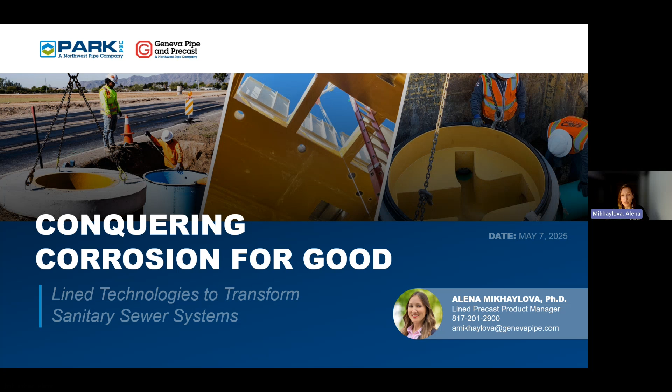Today I wanted to introduce one of the newest technologies you may not have heard of before, but you probably want to know and need to know, because maybe you have the need, or maybe you're working on a project that you may want to apply this product to.

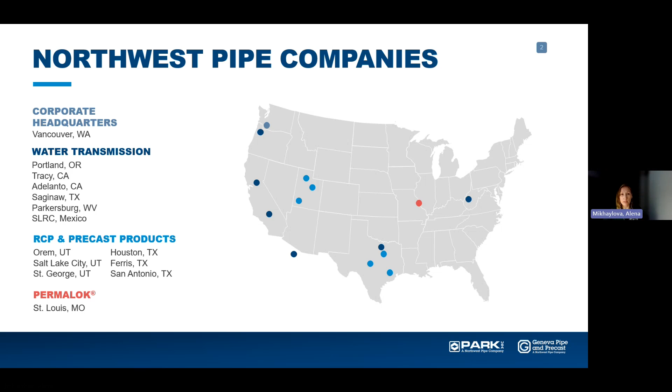So just to introduce our company, Geneva Pipe and Precast is a Northwest Pipe Company that was acquired in 2019-2020. Our footprint is in Utah, you can see the light blue dots in Utah. We also have a sister company in Texas, which is ParkUSA, and now we are ready to bring the products by Geneva Pipe and Precast to Texas through ParkUSA facilities. You can see other dots which are dark blue, they represent our facilities of Northwest Pipe for water transmission lines.

So for today's agenda, we're going to be introducing lining concrete products for sanitary sewer application, and also some products for permanent rehabilitation of sanitary sewer structures. And we're going to go over a couple of case studies that we have done with rehabilitation products. At the end, we're going to have questions and discussions. As Mark noted, you should be able to post any questions that you have in the Q&A section, and at the end of the presentation we will go over your questions. In any case, if we're not getting to your question, we will reach out to you by email responding to your question. So feel free, if you have any question throughout the presentation, just drop a question in the Q&A section.

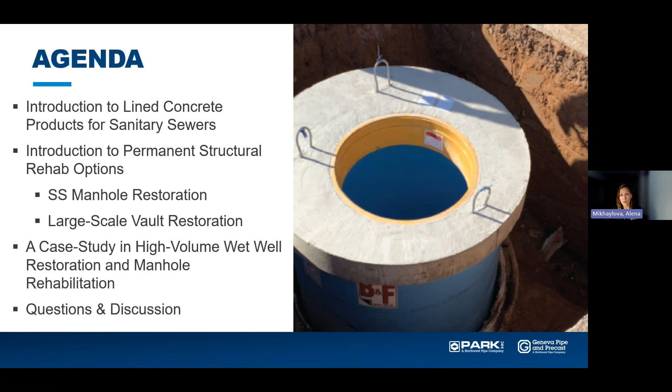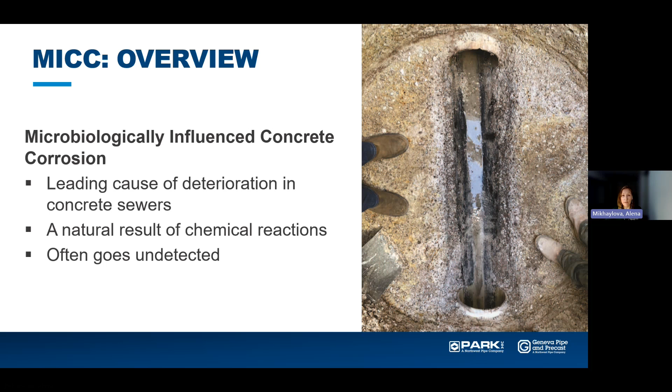So why do we need corrosion-resistant structures in our sanitary sewers? Because the leading cause for deterioration of concrete sewers is microbial-induced corrosion. We all know that over the years, concrete has been used for storm sewers and sanitary sewers, and with time we understood that concrete does not last as long under sanitary sewer conditions, and crumbles and deteriorates much faster than storm sewer structures. That's a natural result of a chemical reaction, and very often it goes undetected because a lot of agencies sometimes don't have asset management programs. They don't survey the structures on a regular basis, and they only find out about the problem once they have an emergency, let's say a collapse in a pipe or a manhole.

So why does MIC, or microbial-induced corrosion, happen? When the sewage goes through the pipe or through the manhole, there are organic matters that break down and create H2S gases. The H2S gases rise to the top, and that's where you typically will see deterioration of the wall in concrete, as it reacts with cement and creates gypsum. Under humid conditions, the gypsum starts expanding and spalling off, and that's a typical mechanism for microbial-induced corrosion. So you're going to have a loss of the wall and eventually potentially corrosion of your reinforcement, which is a structural component of your structure.

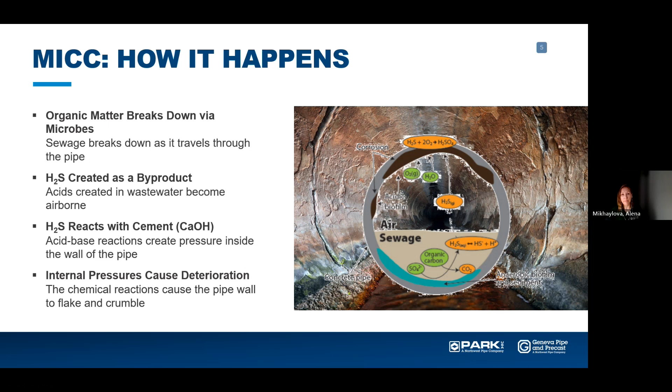In some parts of the US, specifically where you have high heat and humidity, microbial-induced corrosion is typically accelerated. You will also see accelerated deterioration where you have high turbulence or more corrosive environments, like elevated temperature of the effluents, which can also significantly increase the rate of corrosion in your concrete structure. And of course, transit times.

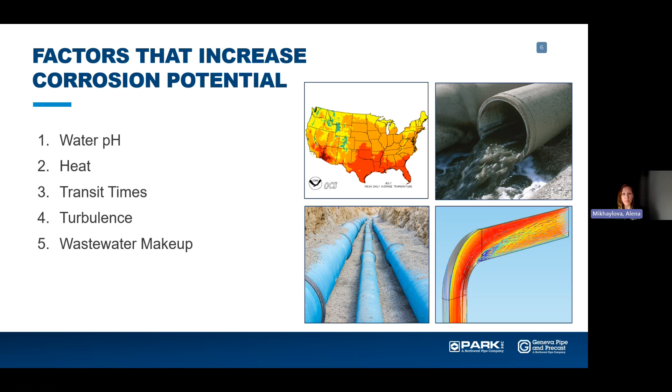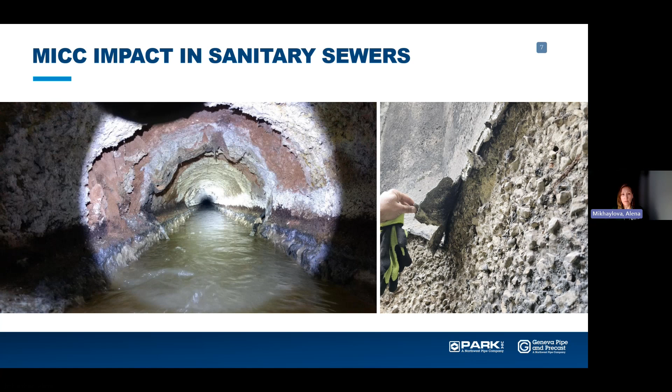On the right-hand side, a photo of a structure that has been previously rehabilitated with spray-on liners. As you see, even underneath the liner, the corrosion continued and the liner starts peeling off.

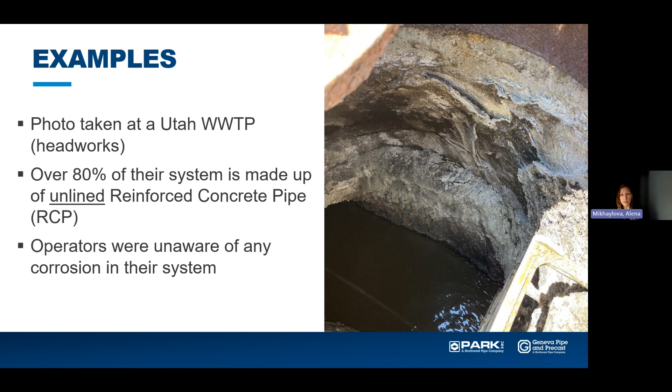You can see some peeling, some gray matter, some odor. Those are significant signs of microbial-induced corrosion.

So how do you identify the corrosion? If you see black or white discoloration, the white typically indicates the formation of gypsum, and black indicates the sulfide presence. There's also the smell of rotten egg, flaking, and a pebbly texture. Sometimes you will not see the flaking, but you will see a pebbly texture on the walls. That's also an indication that your concrete is gradually deteriorating.

Here's another photo, completely different compared to the previous one. Here's your ashy type of deterioration of the manhole.

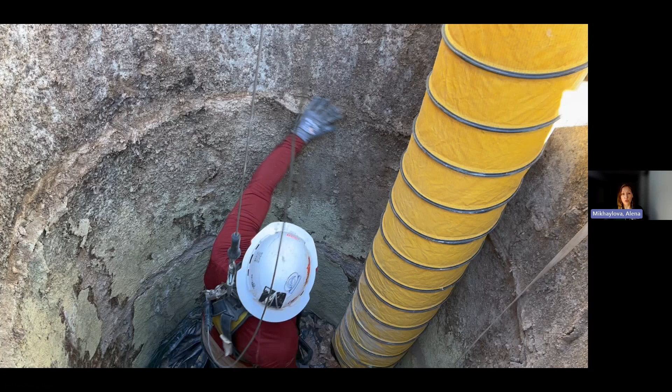I'm going to play you a small video. This was from the rehabilitation of one of the manholes. Before cleaning the manhole, the technician touched the wall just to show how it's deteriorating and losing thickness.

So what are the costs? Microbial-induced corrosion can create significant costs for the agencies, for the cities. There's operation and maintenance - you continually have to go back to the manhole, probably spray it to protect and slow down the corrosion. Then you have to rehabilitate or even sometimes replace. It significantly reduces the service life of the structure, and you have a risk of collapse, especially for structures like pipes.

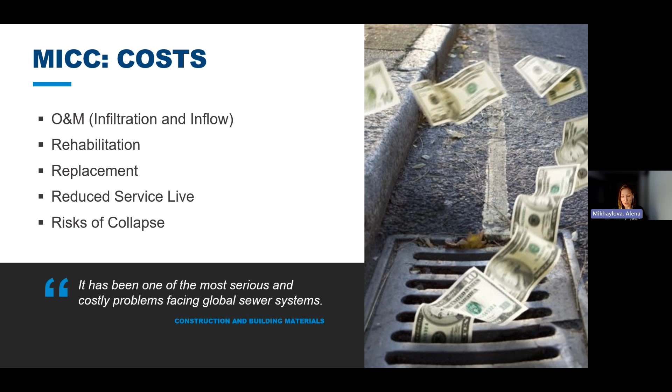So what are the corrosion-resistant options that we know of? One is chemical additives. Then a very common one, field-applied coatings. Then alternative materials and inserts, integrally-lined structures, and structural rehabilitation. We're going to be talking about all of them in this presentation.

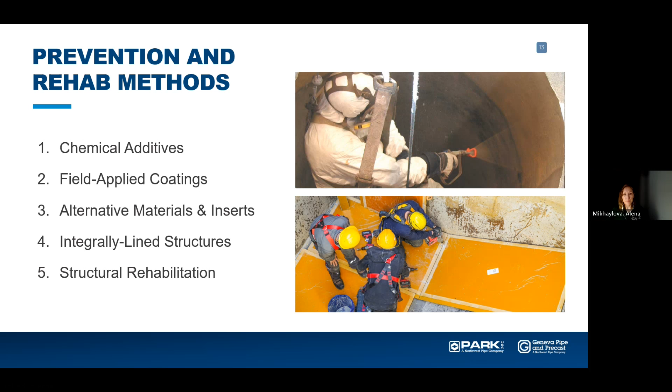So what are the chemical additives? You can add chemical admixtures to concrete to make it more corrosion resistant. It creates anti-corrosion properties in the concrete. However, these solutions are not permanent - they're considered short-term, and with time, the effect of the admixture gradually goes away. But it's very versatile - you can add it directly to the concrete mix structure, and without any additional manipulation, achieve some levels of corrosion resistance.

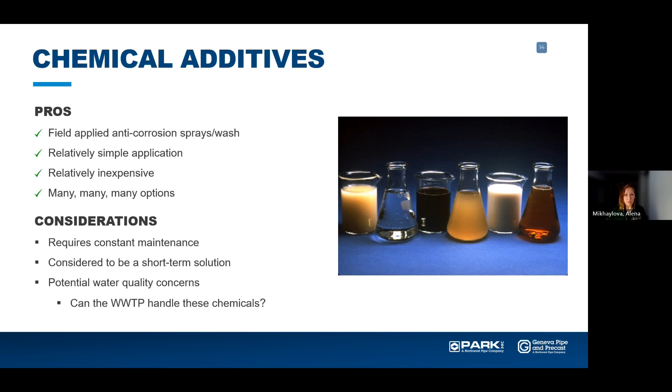The next one is field applied coating. Field applied coating is one of the widely known methods for agencies and municipalities to protect manholes. There's a wide variety of available coatings like epoxy and geopolymers, and it's typically very difficult to determine which one is going to be effective, depending on what you have in your system, how well it's applied, and how well the surface is prepared. So a lot of municipalities just decide by trial and error what's going to work for them.

For these to work, they definitely work - they create a protective barrier between the corrosive environment and the concrete wall. But with time, they can physically degrade, chip and crack, and you may still have corrosion behind the liner. In fact, one of the main failure modes is the pressure you get behind the epoxy liner. If you have infiltration behind the wall, it gets in between the epoxy liner and the concrete wall, and it starts cracking under the pressure and chipping away gradually. Once you have a crack, you're going to have continuous corrosion of your structure.

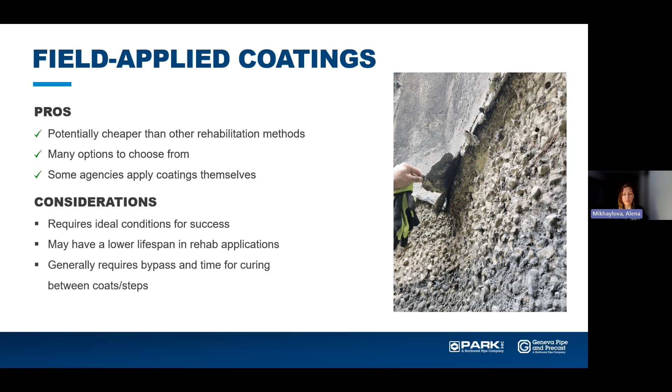Here's another photo of the failure. You can see it also takes quite a bit of time to achieve necessary thickness. You've got to clean it, etch it, dry it, apply it, wait for the layer to dry, come back to apply. So it may take a few days to achieve the necessary thickness of the wall.

Of course, with time, newer spray and liners are becoming more advanced, and you can spray much faster to achieve the thickness. They dry much faster in between the layers. So maximum life of coatings can be anywhere between 2 years, from what I've heard from the feedback from agencies, all the way to 15 or 10 years. But on average, the failure that we're hearing happens in the applied coatings is about 5 to 7 years, where you have to go back and reapply.

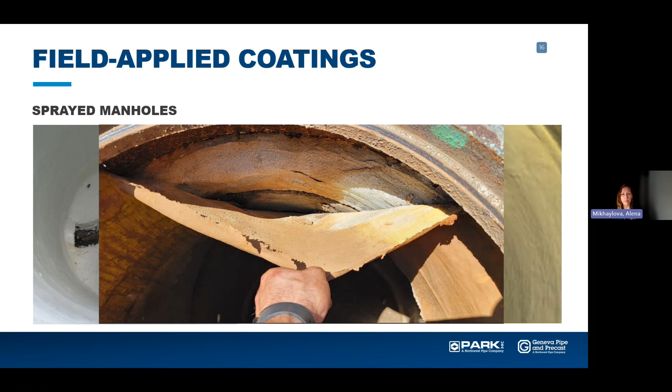So another example of failure of coating, it delaminates from the wall.

So next one is cured in place manholes, or this is another method for rehabilitating manholes or pipes. This type of rehabilitation gives you some structural rehabilitation. It can last 50 years or more based on the manufacturer information. It gives a good alternative for potentially costly, disruptive replacement of your existing manhole.

Those cured in place installations can have environmental impacts, including water and air contamination, which can be mitigated with proper engineering and construction practices. And also, if it's not installed properly, it can delaminate from the wall, from the host manhole, similar to how the epoxy spray delaminates. So preparation of the surface is also vital for this type of rehabilitation method.

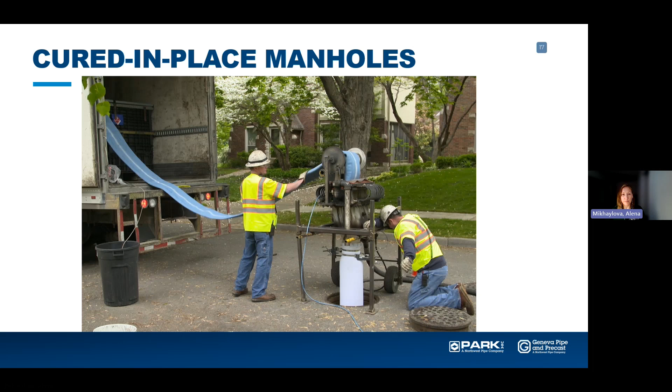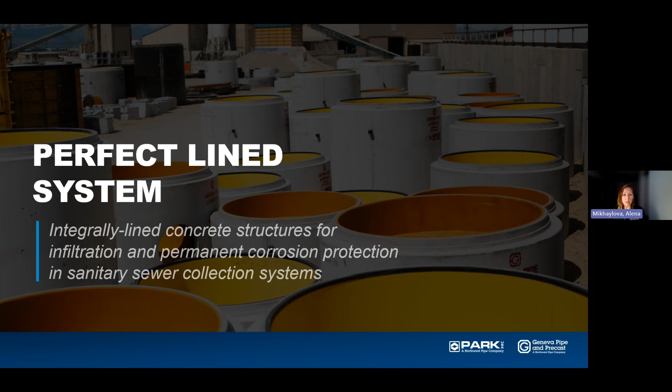So now I'm going to jump over to what Geneva Pipe and Precast and ParkUSA offers for rehabilitation, and as far as corrosion-resistant structures for your sewers.

So this is the first product. This is for new construction. It's called Perfect Lined System, or you may have heard HDPE lined pipe or HDPE lined manhole. It's a fully lined system. One of the biggest differences, it does not require field welding. It's a weldless solution that you can install in the field fast.

So one of the components of this system is Perfect Pipe. You can see the illustration on this slide. So Perfect Pipe, we offer it in sizes of 24 to 48. We do manufacture it in Utah, so this is something to be cognizant about.

So if you have a project somewhere, let's say in Texas, and you need high strength, it's a deep burial, maybe high loading capacity is needed, like aircraft or high construction load, this pipe will provide you that strength. We can adjust the reinforcements in the concrete mix to make the pipe stronger.

Then one of the systems is fully lined, Perfect Lined manhole. It's fully customizable. The available sizes are between 48 to 96 inches. And that's where you don't need to have the welding in the joints. But if you need larger sizes, they are available. The only difference would be you have to weld the joints in the field.

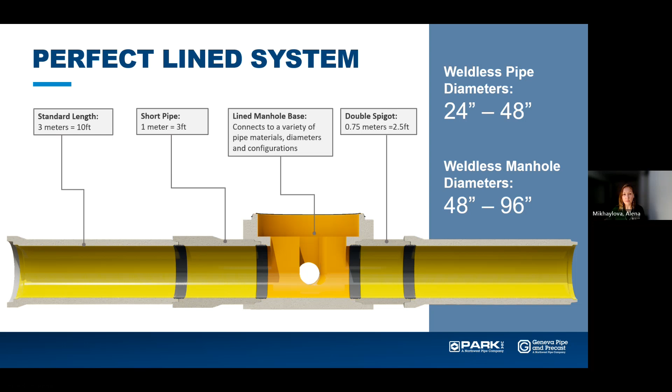So this is a photo of Perfect Pipe. Perfect Pipe features a coupler. So the black coupler on the left-hand side that is attached into the bell, it's factory installed. So all that the contractor has to do is home the pipes together in the field, lubricate the joints, and push it in. No welding necessary. This coupler creates a watertight joint in the pipe.

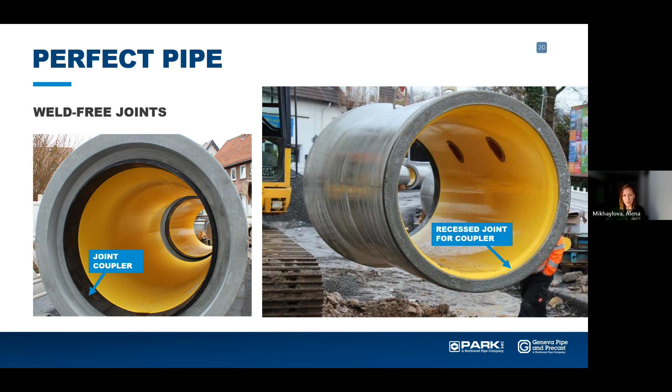So these liners have anchors, and they're integrally cast into the pipe, so they will never peel off. Similar to if you had a spray-on liner, it's not the same. It's an integral cast, so it holds up really well.

And so you may have heard previously, PVC liners were very popular. They started off in the 80s. It was a T-lock. It had some design flaws, and the water would build up behind it and pull off some of the anchors. The advantage of the yellow HDPE liner is it has independent anchors. So in case one anchor pulls out, then you have redundancy of the other anchors holding the liner together.

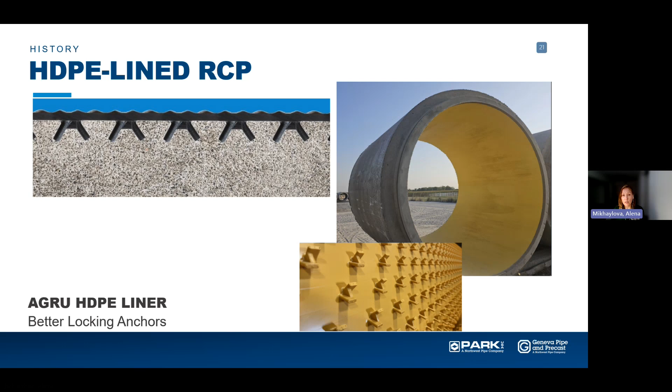So Perfect Lined manholes. Now we offer Perfect Lined manholes in Texas. We do ship them throughout the country. It's a fully lined manhole, fully customizable. It can accept any pipe, not just our Perfect Pipe. We can cast in any connector that you need, whether it's RCP, PVC, ductile iron, and other pipes.

So one of the features is the gasketed connection, which eliminates the need for welding in the field, and also a turnback. So on this slide, you see there is a turnback in between the liner and the wall, so that creates a 90-degree angle. And on top of that, you have a gasket that overlaps this turnback and completely seals the gap in between the joints and prevents any gases going into the concrete.

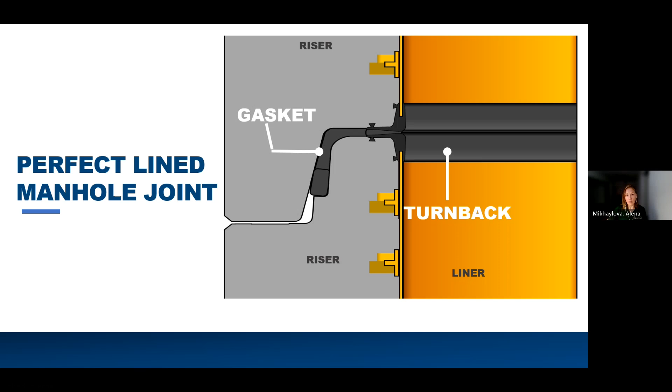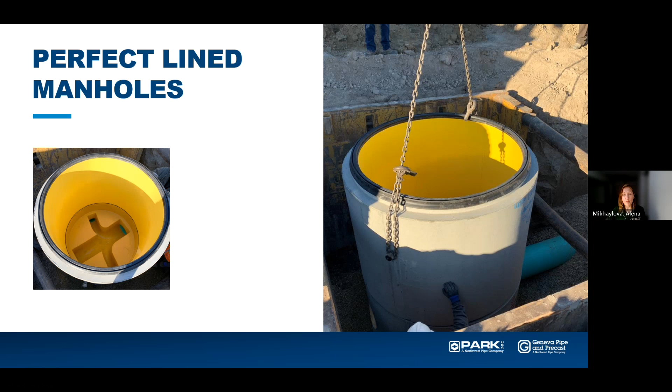So these gaskets are SDV seal gaskets. It sits on top of the spigots, and it's self-lubricating, so the contractor does not need to lubricate the gasket from the outside. It's sand-filled on top, so when you place this section on top of the lower section, the sand helps to uniformly distribute the load and create a watertight seal.

Our manholes also come with liner cones or lids. They can be either FRP or HDPE liners. One thing to point out: FRP is fiberglass reinforced plastic, and HDPE is high density polyethylene. They're both corrosion and abrasion resistant and possess similar properties as far as corrosion resistance.

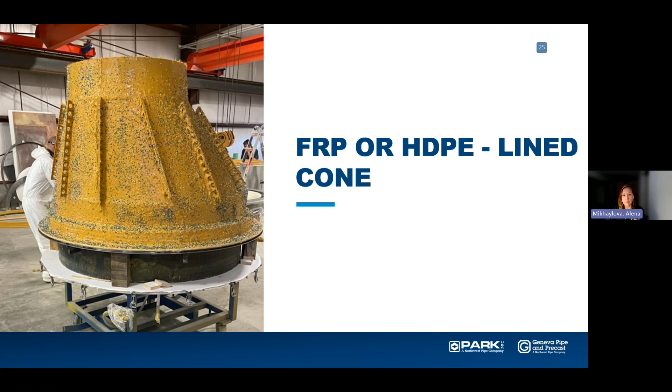I just wanted to show you the slides. This was one of the studies done on fiberglass resin. This was a manhole installed in one of the Canadian sewer systems in British Columbia. The manhole was in service for over 20 years, and they dug it up and cut the core, and measured the thickness of the FRP liner to see if any of it had deteriorated. They also looked at the structure of the concrete, and there was technically no damage to the liner or the concrete.

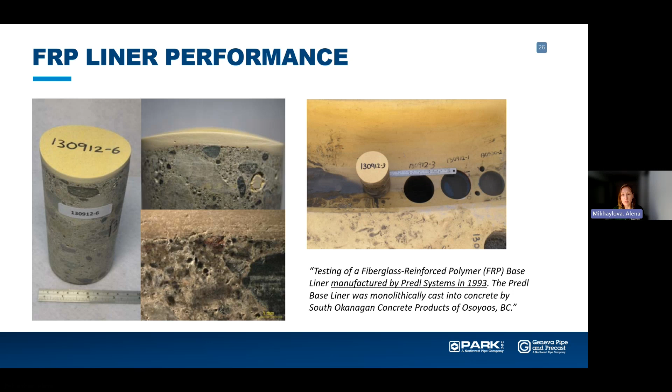So that just proved that this liner works. It's very abrasion resistant, very corrosion resistant. It can last - so we can confidently provide a 50-year warranty with our manholes.

So you can have tall sections, you can have short sections. Let's say if you have a project with shallow burials, instead of the cone we can specify the lids. It's also going to be lined, and you're going to get a fully lined system. This manhole can accept any type of pipe, as I mentioned previously. All the joints are watertight, and all the pipe connectors are also watertight.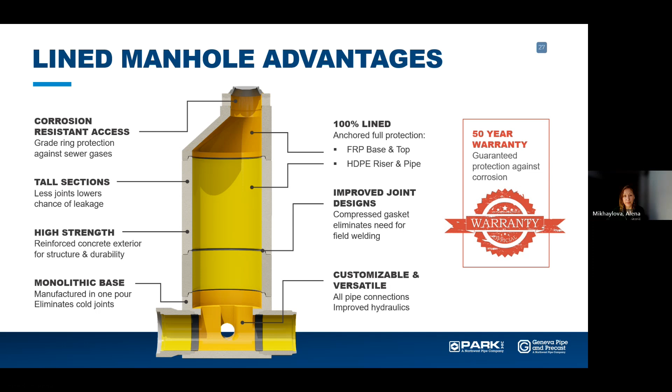As far as the connections to pipes, in lots of parts of the US we're used to having the boots, and for some agencies the boots have brought in some headache. They would require the annular space between the pipe and the boot to be grouted, because when you have the outlet, the flow goes in and there's a lot of debris accumulating inside the boot. That's one of the reasons why some municipalities want this to be grouted.

So it becomes a maintenance item, right? The concrete will deteriorate over time and crumble, and then you have to go back and redo it again. In some parts of the US, they like having the boot for seismic zones - if there's any movement in the pipe, you have the flexibility of the boot. So I understand both sides, and for your project you will have to decide which one you prefer.

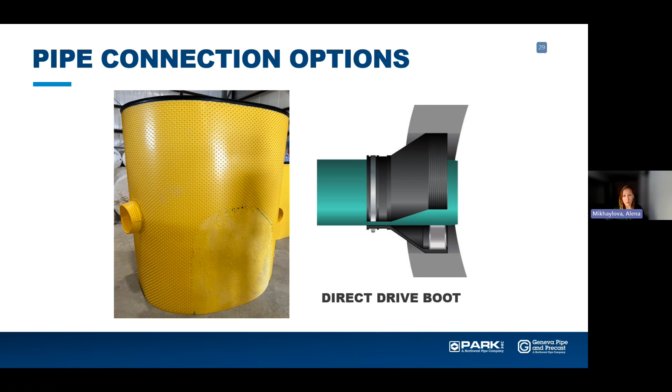Because we have another option for Perfect Lined manholes: semi-rigid connectors, bell connectors that we build into our manholes. Smaller sizes up to 12 inches are made out of polypropylene. You can see the grooves in here, the several steps - it's for seating the gasket. The pipe is going to sit a little bit on the upper side, creating a very smooth transition between the pipe and the trough of the manhole.

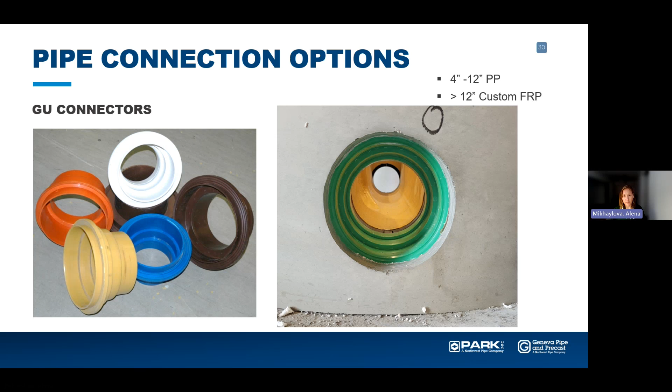And so, yeah, this is a Perfect Lined manhole. This is a gasket up close. The top consists of - it's sand filled for even distribution, and this part slides down. It's self-lubricated on the inside.

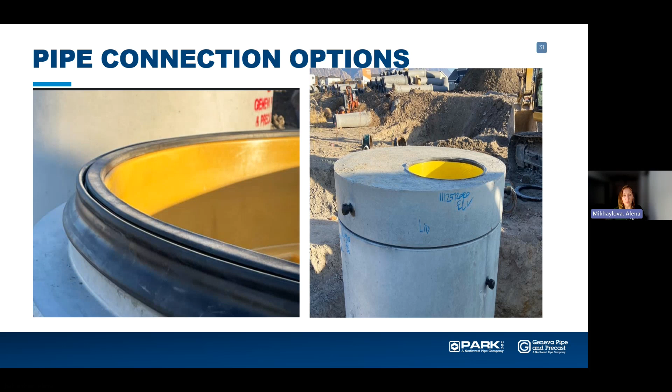If you're thinking about the total cost, yes, Perfect Lined manholes might be more expensive than sprayed-on counterparts. But when you spray your manhole with a coating, you have to go back to it occasionally, every 7 to, let's say, 15 years. And if you think about the lifetime of the structure, after 50 years it's going to get so much more expensive, thinking about how much money you spend on bypassing, spraying, cleaning, versus if you invest a little bit more upfront, then you don't have to worry about maintenance, except for, of course, if it's clogged.

HDPE liner and FRP liner are both very smooth, so little things stick to them. You can't even use glue to stick to it, though it has to be a special glue. So it should be very easy on maintenance too.

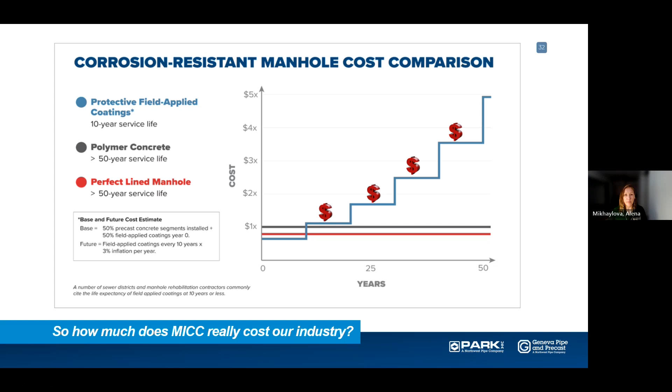So I'm going to move on to structural rehabilitation options. I think this is one of the hot topics throughout the US, with ASCE releasing the infrastructure report cards. We know the infrastructure in the US is crumbling, and a lot of owners are scrambling to figure out what to do. Do we replace? Do we rehab? So we have some options for rehabilitation.

One of them is a hybrid PVC manhole. You can see the image of it and the idea of how the rehabilitation is done on the right-hand side. One of the pros is it does not necessarily require a bypass. If you have a predictable flow, and you don't have very high turbulent flow, you can do it in off hours, say between 8 and 12 when everybody's at work. You only need maybe 20 to 50 minutes to plug the holes and install the base liner, and that's all the time you need. So if you have a small or low flow, you can do it without needing a bypass, which can save a lot of money, because we all know a bypass can cost thousands of dollars per day.

It's a relatively simple installation. It can be done in-house, and we have some owners that have done that in-house. The instructions on installation are very straightforward. We technically provide a guide for installation, and we have some videos as well on installation. It's very difficult to install it incorrectly.

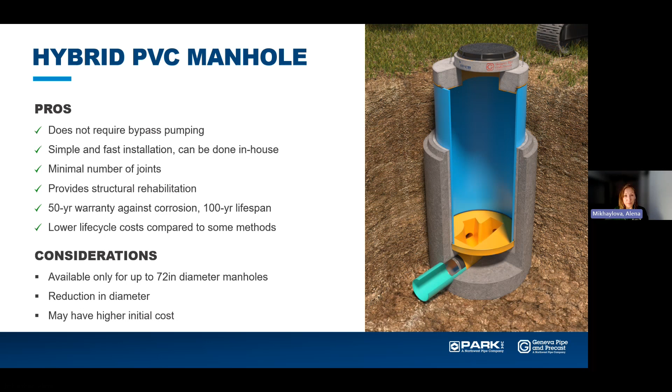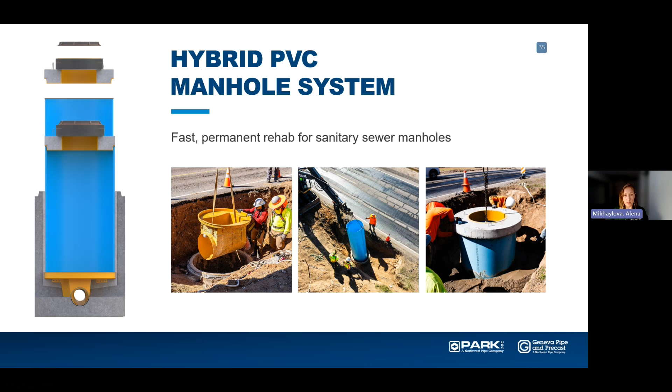So it's a fast, permanent rehabilitation system. It consists of the base liner. Looking at the left-hand side of the slide, it has a base liner that is first lowered into the manhole. So this is a liner being lowered, then followed by lowering of the riser, and then the lids. That's it, basic explanation.

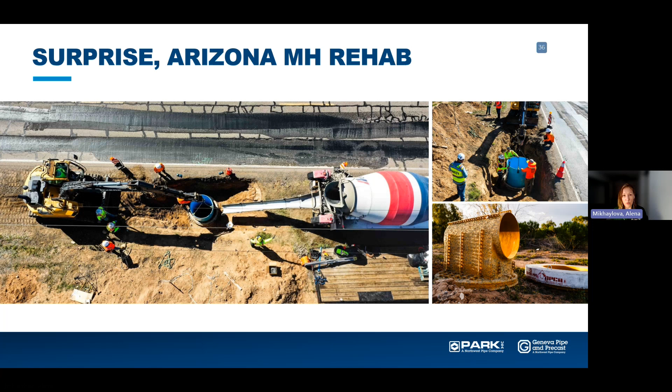But we're going to go over an existing project that we've done last year for Surprise, Arizona. That was a city. So they reached out to us, and they've done previous rehabilitation of these manholes. It was right next to the roadway. Those are the emergency manhole rehabilitations that were right downstream from the lift station. They did not want to bypass and stop the flow, and they wanted to have a permanent solution.

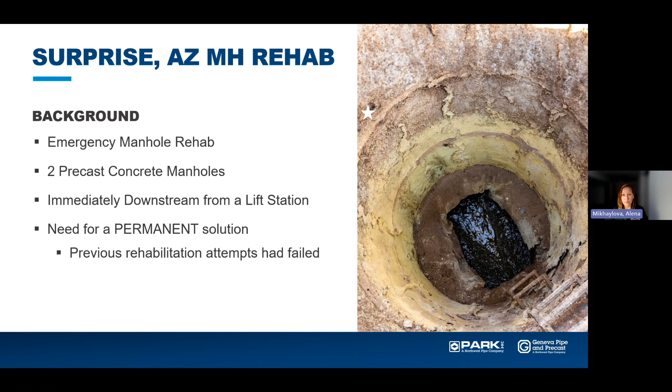Because these manholes have been rehabilitated previously, and the liner kept failing. They did have a constrained worksite area because it was right next to the roadway. They did not want to stop the lift station. They wanted to keep going. And they wanted to save money by not bypassing the flow.

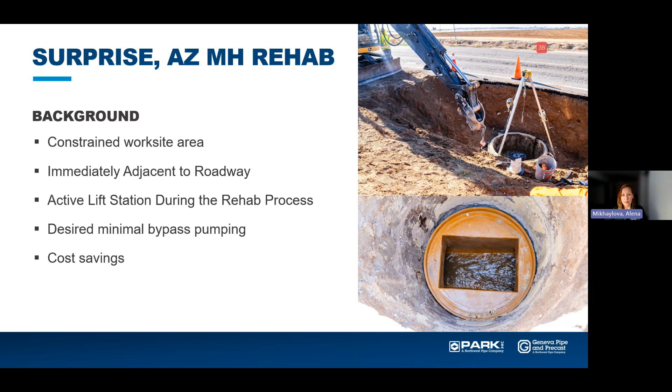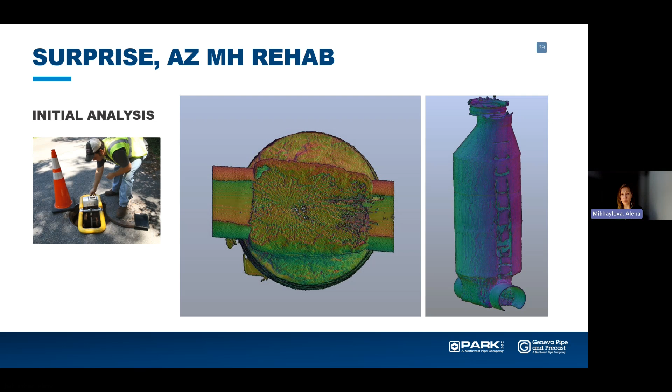So what you do first, if you have the manhole that you want to consider rehabilitating, you first have to provide us with a digital model of your manhole. There are quite a few companies these days that scan the manhole and put it into a digital format, and we will take this format and create our own model, and use a robot to create a custom-made mold that will fit the base precisely.

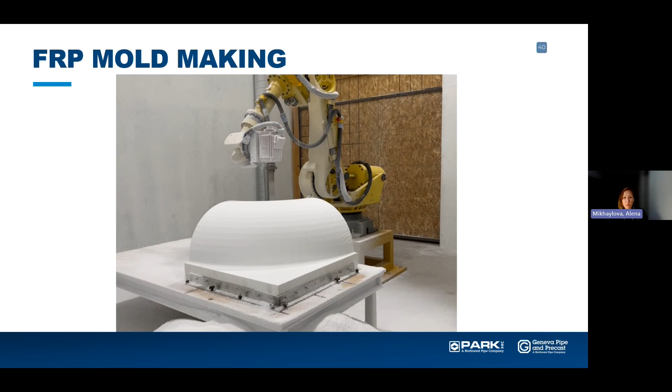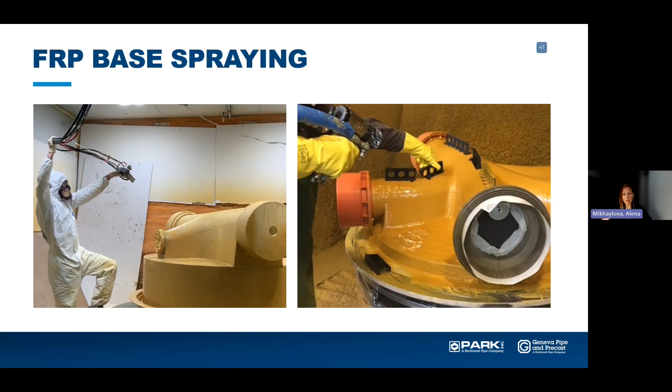So once we create the negative mold, we spray it with fiberglass and chopped fiberglass in resin. Then once we achieve the necessary thickness, we attach what's called bonding bridges, on the right-hand side. Those are the bridges that are going to be embedded into the grout, so that will not allow the base to move.

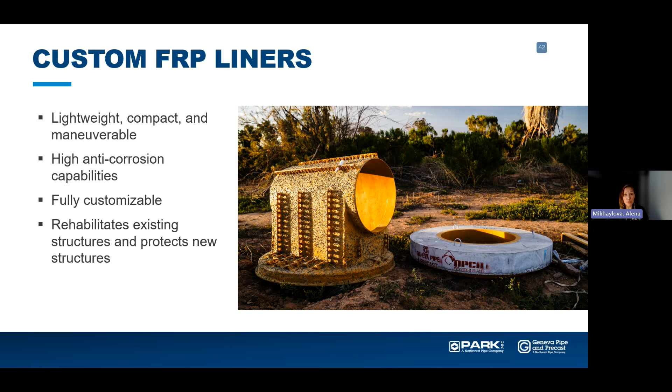So this was a liner that we manufactured for those manholes. This liner is pretty light, corrosion resistant, and also your lid becomes lined as well.

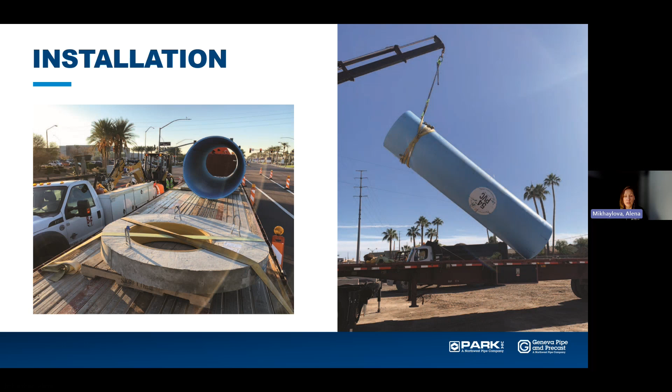Then lower the liner, and remember that the flow is still going. So now you lower the liner, it sits inside the existing trough. The flow is going. The next step would be to plug the inlet and outlet. You first plug the inlet, let the water from the channel go away, then plug the outlet.

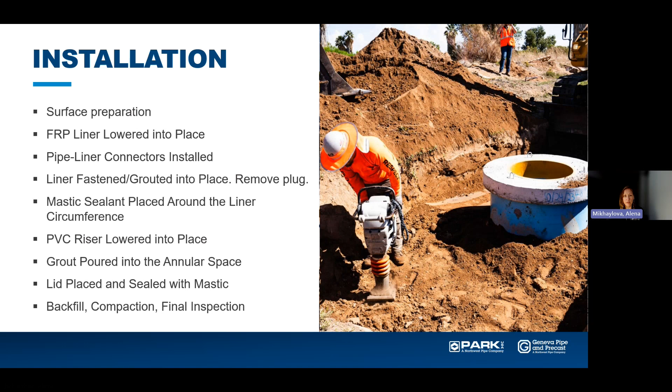And once you grout it, so the riser is setting tight, and then you place the lid on top. Once you place the lid, you backfill, compact, and do final inspection.

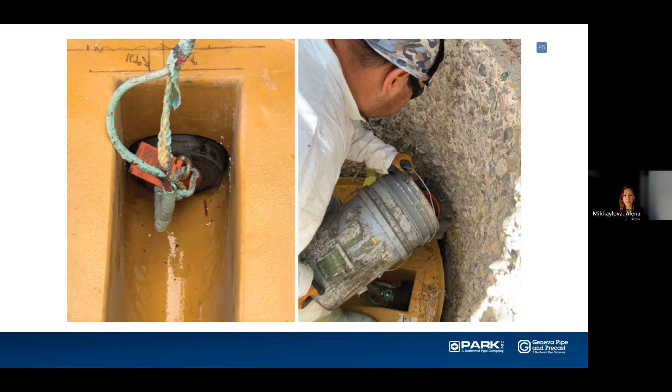So this is just a close-up photo of how the workers have done installing the base liner. That's a plug on the left-hand side, and grouting the base liner in place by hand. So this is lowering and plugging again.

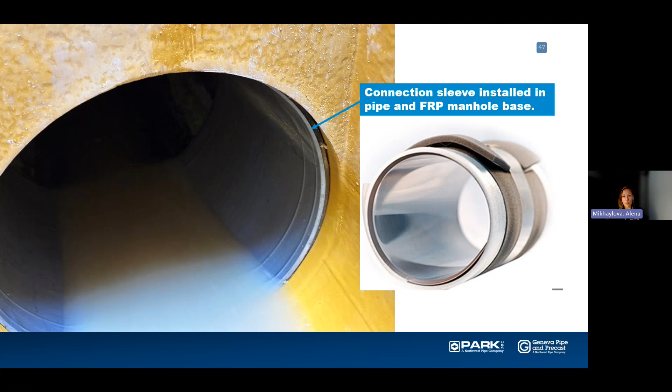And this is how the connector between the liner and the existing pipe looks like. It's a sleeve type of connection. So you're going to have a little bit of a lip, but it's very insignificant. It's probably like 1/8 or 1/16 of a lip, which is very insignificant. It's very smooth too.

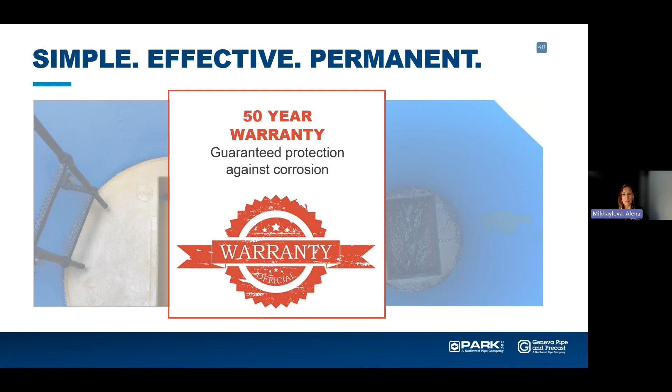And if you need steps or stairs, we can install the polypropylene ladder. We do recommend this type of ladder because it has a minimal number of penetrations, because you don't want to introduce additional penetrations, which can be potential leaks and pathways for the gases to get into concrete. And these days, everybody's going away from steps and ladders, and they just use a tripod to lower the person into the manhole. Again, we offer a 50-year warranty on this product.

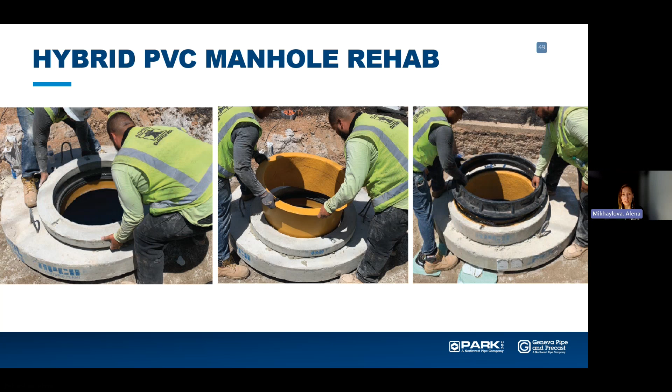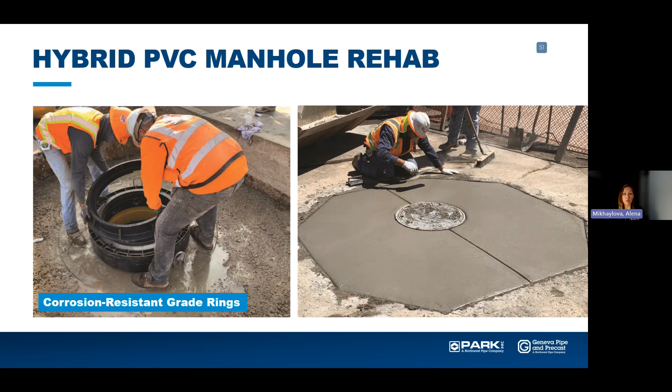Then you install the grade rings. If you want the grade rings protected, there is a corrosion-resistant chimney that exists. Then you put the frame and cover on top with the mastic. So on the left-hand side, there's a corrosion-resistant grade rings. There are several available - there's one from Cretex, or some they are Pro rings, and HDPE grade rings also exist. So whatever your preference and whatever you allow on the project can be used.

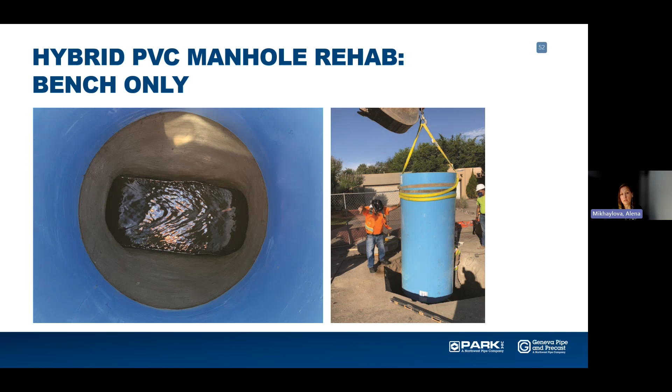And if you have a drop manhole, the hybrid PVC manhole can accept drop pipes. We do have this drop bowl. It has a little lid on the side that you can remove and maintain the pipes.

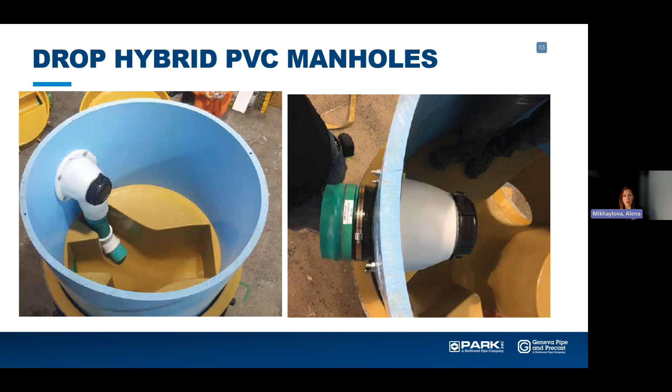All right, so I'm done with hybrid PVC manholes, and I'm going to move on to the next product that we offer, last but not least - it's a composite FRP rehabilitation panels. So these panels are suitable for square structures. Right now, we do not have an option for round structures. However, for wet wells, if you have square lift stations, these would be the perfect candidate for rehabilitation.

So these provide a permanent rehabilitation solution. Again, it's not a spray-on liner. They mechanically attach to the wall, and they will never come off or peel off. It's a fast and simple installation. We have training options available for the contractors who want to install these.

These are easily customizable, so you can work with this product kind of like drywall. You can cut it to the shapes and size that you need right in the field. They're lightweight, so they don't require many people to work on these - the person can lower these panels inside the hole by himself. And we offer a 25-year warranty on these panels, and it has a 100-year lifespan.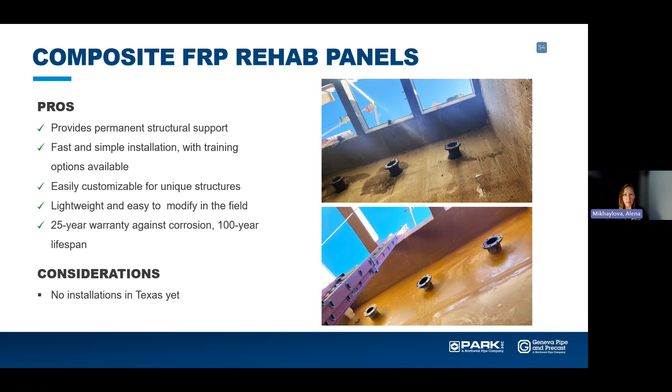So let's look at the case study that we did for Bullhead City in Arizona. This was a wet well rehabilitation. They had a total of 4 wet wells that they wanted to rehabilitate.

Previous rehabilitation methods have failed, and as you know, spray-on liners will require some bypassing and drying of the wet well during application, and that can get very expensive if you're doing it several times.

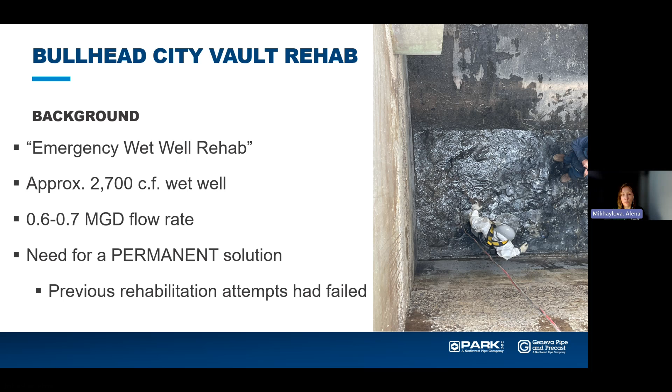So this wet well was 2,700 cubic feet, 0.6 to 0.7 mgd flow rate, and they were looking for a permanent solution. They were pretty large structures, so it would have been very expensive to excavate and replace.

They also had some constraints on the job site. It was in a residential area surrounded by residential houses. The work area was pretty tight, so they did not want to do any disruption or inconvenience to the neighborhood. And again, they wanted to do minimal bypassing of the pumping to save on cost.

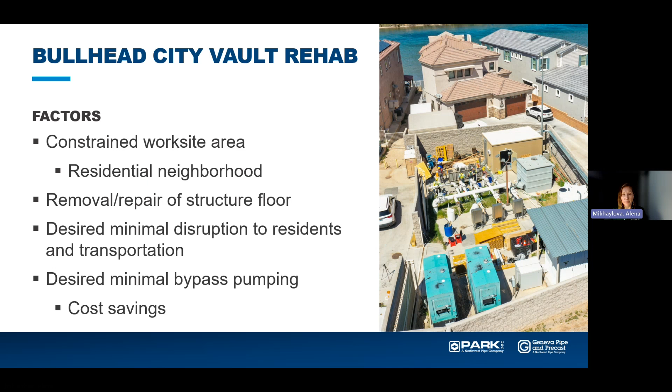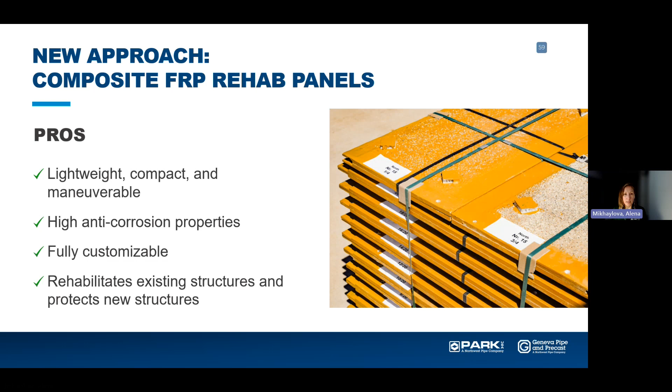So the panels themselves are about 30 inches by 60 inches, and that size was specifically designed so you don't have to remove the lid of your wet well — you can directly feed it through the hatch without the need of removal. So you don't have to excavate anything, and you can feed the panels directly into the wet well. It has anti-corrosion properties as well, just like our Perfect Line manholes.

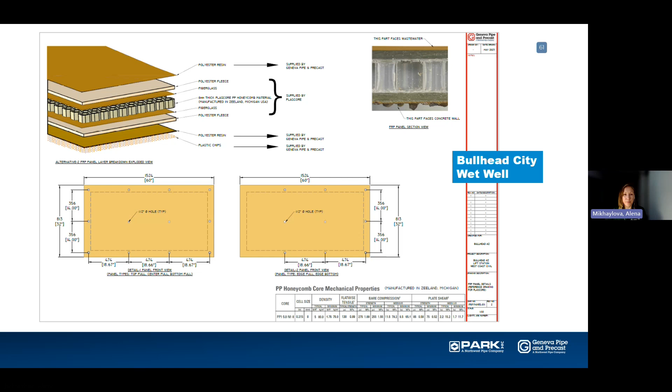So this is one of the submittals for our panels. It describes the honeycomb structure, the size, the thickness, the compressive strength, and the composition of the panels. And this would be a submittal drawing to the engineering firm or to the owner.

If your wet well is too complicated, we probably will have to scan it to determine the size. If you don't have as-built dimensions, or if you have any penetrations, we need the exact location, and we count based on that — how many panels you're going to need and what type.

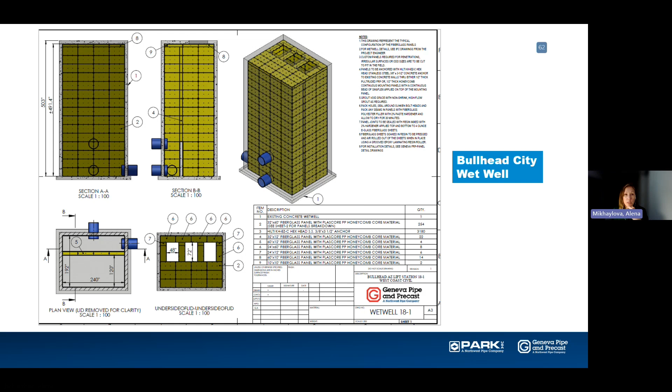So surface preparation, again, is not super extensive because it's not a chemical adhesion — it's a mechanical attachment. So pressure washing will work.

Again, if you do lining of the floors, you want to do leveling of the floors, then panels are installed across the floor, bolted to the floor, and then you seal the seams. Then you move on to the walls. Once you have the floors, you install panels row by row. So you repeat this process.

You install it on the wall, one row, seal the seams, and grout behind. Again, you can cut it right in the field — it's very easy to cut just with a circular saw or jigsaw. And you're going to have a fully lined structure at the end.

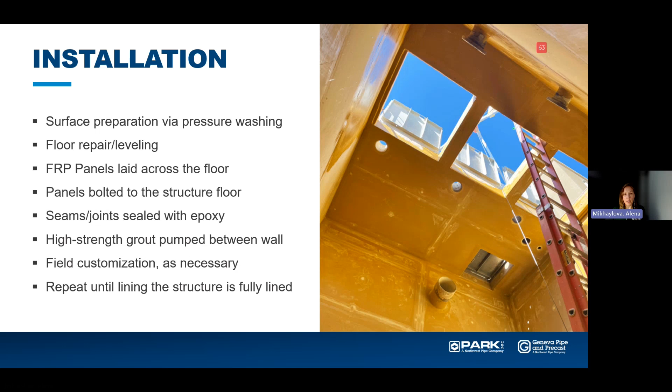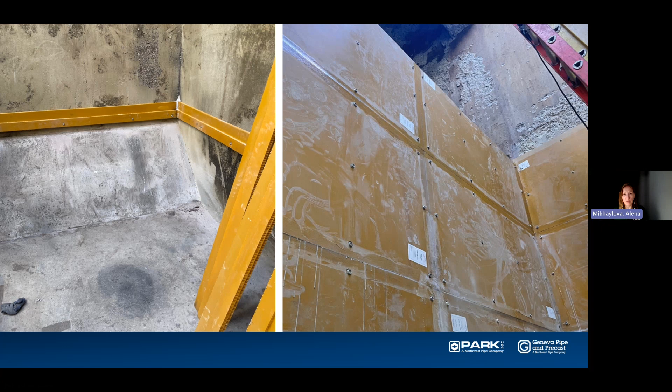So this is the process of installation. Once you transition from the floor to the wall, you have ledgers installed — you can see the bolts over here. They will be sealed with epoxy at the end.

Some more pictures — this is the lining around the openings. And this was one of the lift stations that we did for Bullhead City. I think this is an amazing application of FRP panels and where it can be super useful.

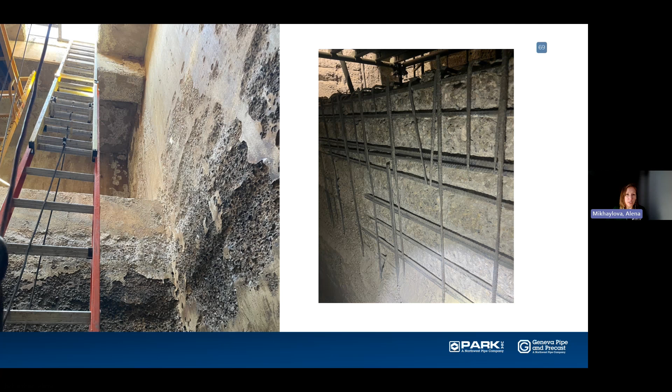There was a lot of wall thickness gone in this lift station, along with some damage to the reinforcement. So they used these panels to restore the wall thickness, and placed new reinforcement in the places where it was gone and where the wall was deteriorated.

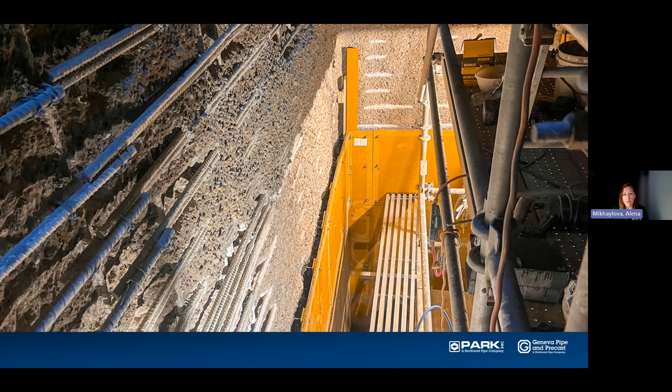Typically, we only have one thickness of panel in between the wall and the panel, but in this case it was 3 thicknesses. So about 2 inches worth of the wall was gone, but they were still able to rehabilitate and restore this wet well because they used this system.

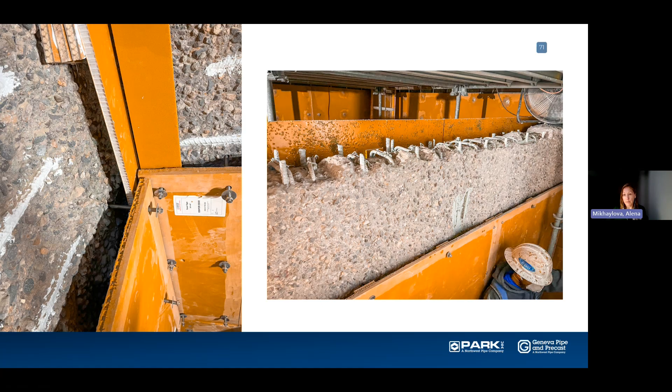The first question was, what is the load rating for hybrid PVC manholes? Yes, it is rated for highway load. It's H20 load rated.

The next question: is there give and take in the lined sewer manhole if a pipe connection to manhole needs to be raised or lowered in the field? So again, the openings are made for a specific location. We make the liner and cast it into the manhole. The only way you can have a little bit of give, if you need to raise it a few decimal inches, you can probably use a boot to adjust it. But otherwise, if it's a few inches, you'll probably have to drill a new hole or make a new base for it. But if you have a specific case in mind, feel free to shoot an email to me and I will look at it and advise.